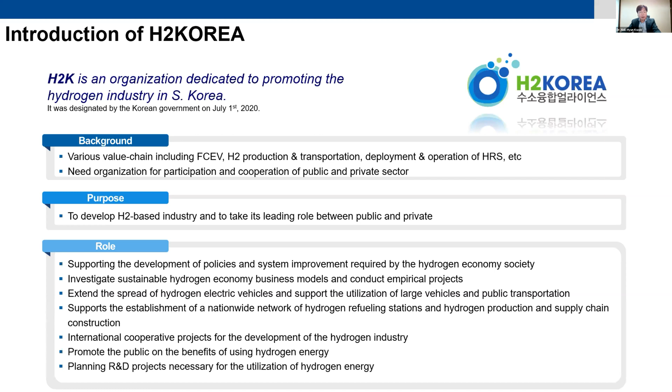H2KOREA has 104 members, including the central government, local government, companies, research institutes, academic societies, and associations. Let me explain the roadmap for the Korean hydrogen economy.

President Moon Jae-in announced the South Korea hydrogen economy roadmap in January 2019. It also declared the vision to become the world's top-class country in hydrogen economy. The Korean government divided the hydrogen economy promotion system into 3 stages by 2040.

As a first step, it is a preparation process for the hydrogen economy by 2022. Since 2018, the government has been making efforts to create policies to boost the hydrogen industry, expand the supply of hydrogen cars, build hydrogen refueling stations, and create laws and systems. The foundation for entering the hydrogen society will be set up by 2022.

The second step is to create a hydrogen economy by expanding the hydrogen industry. To that end, Korea is working on projects including hydrogen cities, expansion of infrastructure from hydrogen production to storage, hydrogen ships, and hydrogen trains. By 2030, we will see a model of a hydrogen economy society in Korea.

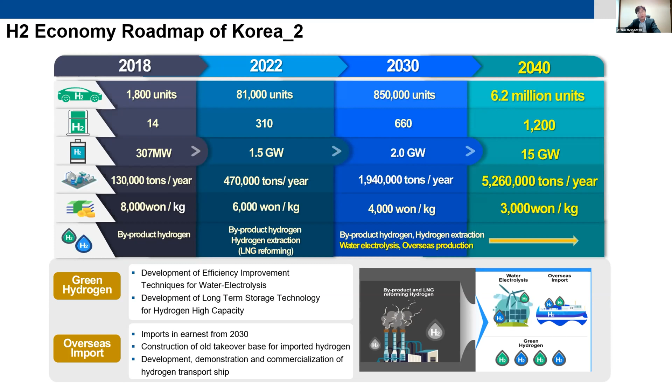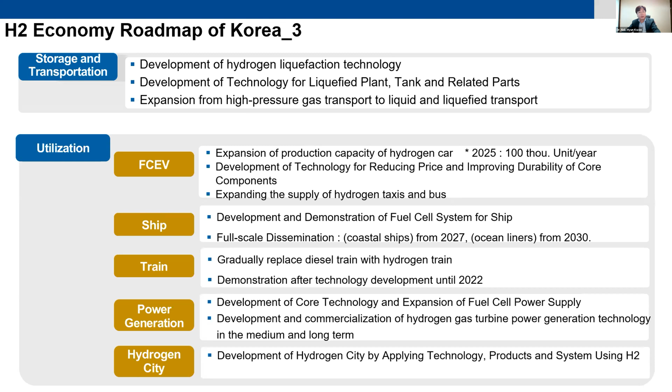Recently the government finalized its roadmap for hydrogen technology and announced it in October 2019. Through this announcement, Korea's vision was to become a leading hydrogen economy by securing world-class technology. You can see here.

First, in the hydrogen production sector, the government set a target of raising the hydrogen demand to 5.26 million tons per year by 2040, and lowering the average supply price, including transportation cost, by $3 per kilogram.

In the storage and transportation sector, the government will upgrade the technology for storing and transporting gas hydrogen to lower the cost of transporting trailers by $0.7 per kilogram.

In the utilization period, Korea has set up a plan to commercialize medium and large hydrogen construction machines, hydrogen trains, hydrogen ships, and hydrogen drones for large-scale logistics transportation by 2030.

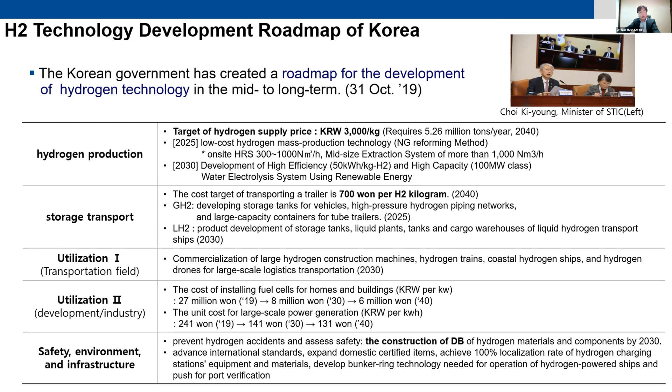To that end, the government plans to complete construction of a database of hydrogen materials and components by 2030.

The government announced its strategy for developing the future automobile industry in October 2019. The main content of this strategy is for all-electric vehicles, including hydrogen electric vehicles, to achieve 33% of vehicle sale share in Korea, and to achieve 10% share in the global market.

In particular, the government planned to expand the lineup of hydrogen vehicles to include SUVs and large trucks, and to achieve a durability of 500,000 kilometers by 2022. It also planned to lower the price of hydrogen vehicles to around $40,000 US.

Hyundai Motors Group presented its FCEV vision and announced a long-term roadmap for 2030. It has set up a plan to produce 700,000 fuel cell systems by 2030, including 500,000 FCEVs per year. In addition, Hyundai Motors Group said it would invest about $7 billion US by 2030 to develop the FCEVs.

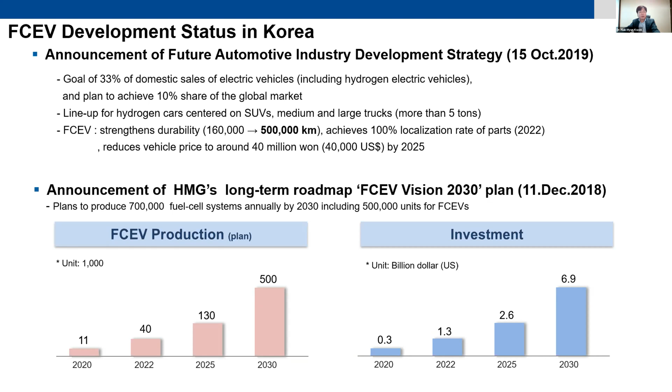This is the Nexo, mass-produced by Hyundai Motors in January 2018. Nexo has made many technology advances compared to the Tucson FCEV, which was mass-produced in 2013. Compared to the Tucson FCEV, output performance is improved by about 20%, and system efficiency is improved by 10%. It also increased durability and lowered prices.

It also starts at minus 30 degrees and can run 609 kilometers on a single charge.

Now, the status of development of large hydrogen cars such as trucks and buses in Korea. Recently, the government has been expanding the distribution of city buses to hydrogen buses as part of an effort to reduce fine dust in the city center. It also plans to develop and distribute hydrogen cars for large trucks weighing more than 5 tons.

Hyundai Motors Company has developed a hydrogen city bus and plans to distribute 35 units to 6 cities, including Seoul, by this year. The hydrogen truck was also developed and applied to garbage collection vehicles, and will be operated in Changwon City. In addition, Hyundai Motors signed a supply contract with H2 Energy of Switzerland for 1,600 hydrogen trucks.

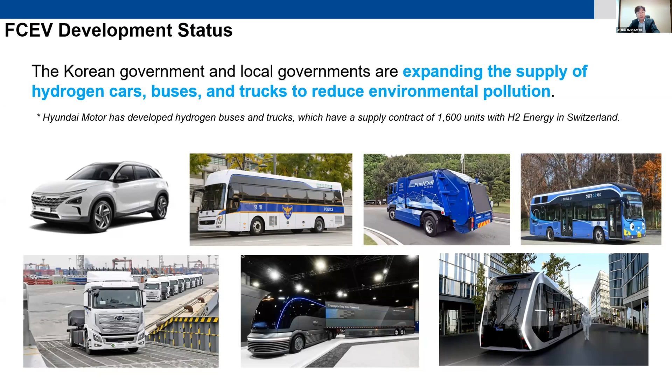Now let me tell you about the current state of the hydrogen economy in Korea. Korea's hydrogen economy operates about 12,000 hydrogen cars, 100 buses, and 20 taxis in service. 1,517 FCEVs were exported as of October 2019.

The pictures below show the operation of hydrogen taxis, hydrogen buses, fuel cell power plants, and a hydrogen refueling station built at the Korean National Assembly. 81 hydrogen refueling stations have been built across the country, with about 118 hydrogen refueling stations scheduled to open by this year. Currently, fuel cell power generation has 53 plants in Korea, producing about 658 megawatts of electric power.

In particular, it is supplying 7.1 megawatt power to buildings through fuel cell power generation.

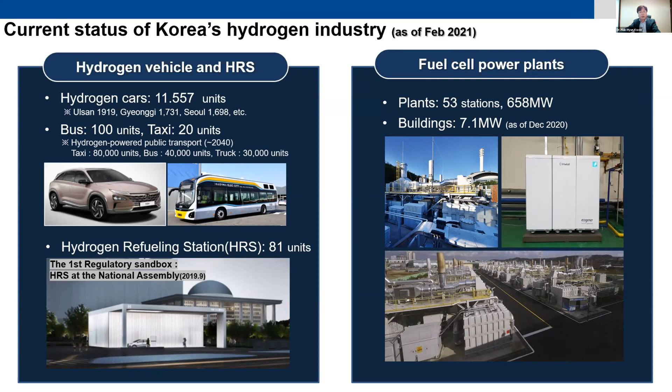Korea has set up a plan to build a nationwide hydrogen charging infrastructure network along with the expansion of domestic hydrogen car supply, and announced a strategy to develop hydrogen refueling stations in October of last year. We are reviewing various refueling and transport methods for hydrogen based on purpose, considering the operation and economics of hydrogen refueling stations. Currently, most high-pressure hydrogen refueling stations are located in certain areas, but in the future, stations using liquefied hydrogen will also be built around the city center.

In addition, hydrogen transportation will be diversified, not only by tube trailer transportation, but also by pipeline transportation and liquefied hydrogen transportation.

Korea is planning to build hydrogen charging infrastructure by considering economic feasibility, scalability, and regional characteristics by expanding hydrogen charging stations. By 2030, 616 hydrogen stations will be built in major parts of the country.

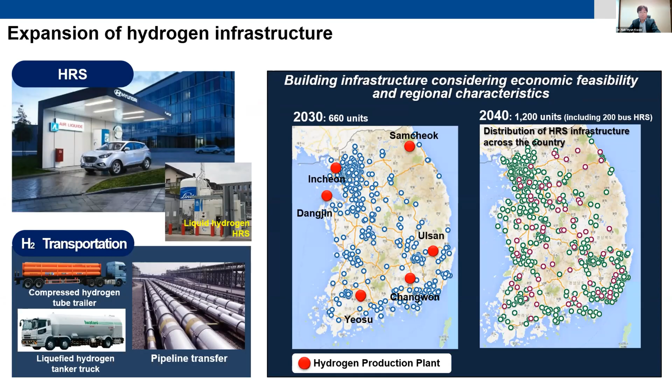Korea is pursuing a specialized hydrogen industry project, such as hydrogen related cities, hydrogen producing clusters, R&D specific cities, and hydrogen mobility clusters. There will be more projects coming up, and by 2030, there will be a visible hydrogen society.

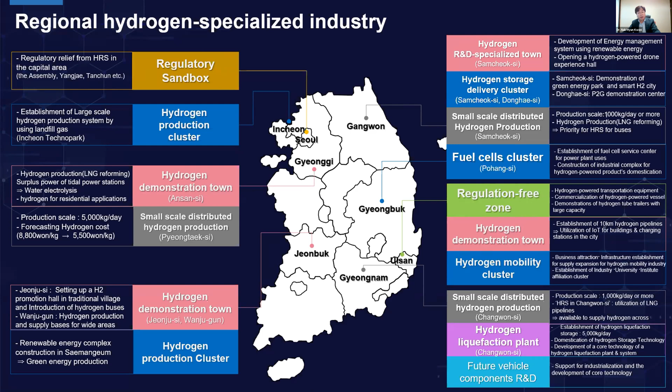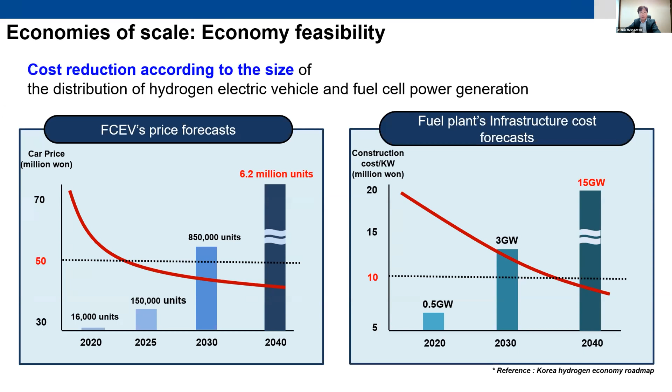The construction cost of a fuel cell for power generation is currently around 20 million Korean won per kilowatt, but the construction cost is expected to continue to decrease as the construction of power generation facilities increases.

The transition to a hydrogen society has many advantages in reducing greenhouse gas emissions and improving environmental problems. The growth of new industries can also lead to the expansion of the new job market and to national value added.

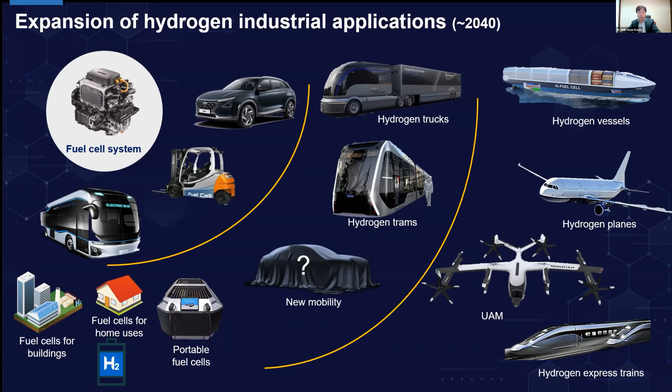However, in order to become a hydrogen society, it is difficult to grow by considering only one country. International cooperation is more important than anything else. The global hydrogen economy will be realized only when countries cooperate with each other in their strengths and technologies and grow hydrogen markets together. As Korea will expand its global hydrogen industry cooperation network with hydrogen promotion organizations around the world, it will support information exchange and global technology cooperation with hydrogen associations and international organizations in each country, and serve as a bridge between the government and the private sector through a cooperative network.

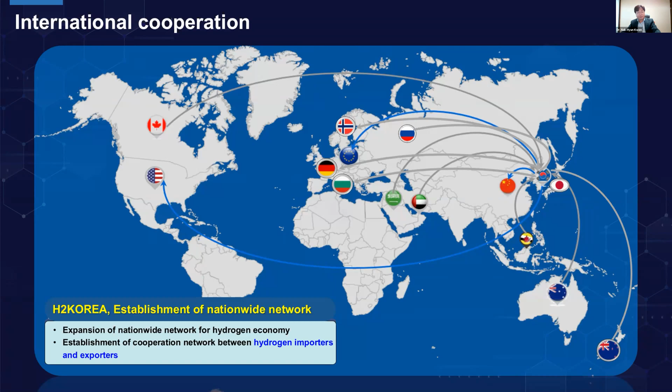As mentioned earlier, Korea plans to push for the introduction of hydrogen, which is lacking, after 2030. To this end, the Korean government set up a plan in July 2020 to build an overseas hydrogen supply chain as a way to ensure a sustainable hydrogen economy. Through this, we believe Korea will promote sustainable growth of the hydrogen industry by securing a stable hydrogen supply chain and contribute to future energy security and the stabilization of hydrogen prices. The government has set up a three-step stage to introduce CO2-free hydrogen overseas.

As a first step, we will conduct a feasibility study for one year. In this process, we will investigate future CO2-free hydrogen production countries and analyze economic, environmental, and technology feasibility according to hydrogen production and transportation methods by country to derive domestic introduction scenarios.

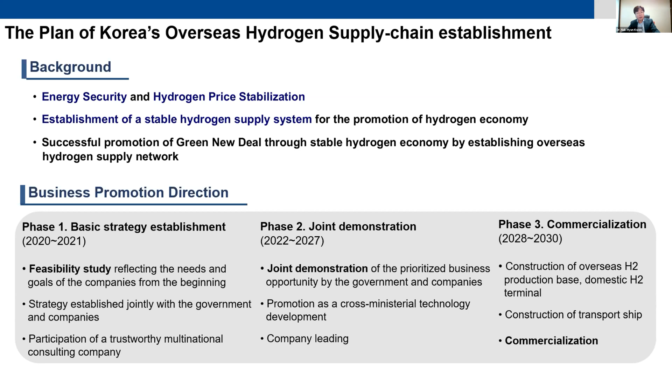Now I will explain the feasibility study for the introduction of CO2-free hydrogen overseas. The first phase of this feasibility study will be conducted by H2 Korea from the end of this year, as a government project.

Hydrogen production will involve a 3-dimensional analysis of technology, environment, and economy for all stages of domestic import and distribution, with a focus on customizing a feasibility study for each country for the introduction of hydrogen abroad. To this end, we will draw up a basic concept design for hydrogen production, storage, and transportation of import-export terminals, reviewing an economic model for hydrogen introduction unit price.

Select a core strategic country for hydrogen introduction and prepare a scenario for CO2-free hydrogen introduction.

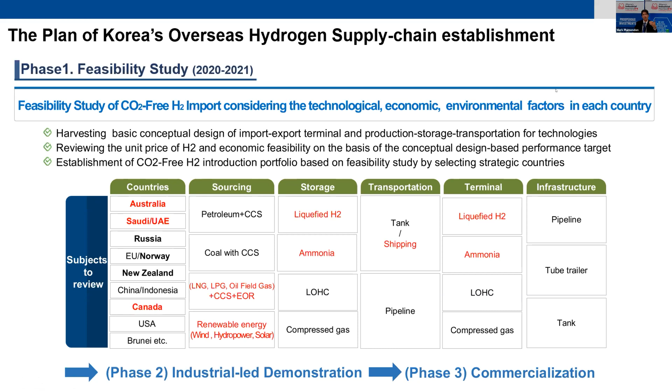Dr. Kwan, thank you very much for the presentation. Lots of information there, very interesting and relevant to all the viewers today. There are a number of questions that have come in on the chat, and I'll ask them to you, hopefully you can provide us some further insight. Some of the questions are around the preferred type of hydrogen, whether it's liquefied hydrogen, organic carriers, or ammonia. Is there a need for all types of hydrogen carriers, or what's your view on demand for the different types of hydrogen that could be delivered into Korea?

Dr. Kwan, did you hear my question? Oh, sorry. Did you hear my question, Dr. Kwan? Yeah. The consideration of introducing hydrogen from overseas into Korea, what type of hydrogen is imported?

First of all, liquefied hydrogen is difficult in the short term because the transportation ship and storage transportation technology are not optimized. The same goes for MCH. Therefore, ammonia, once its transportation technology is commercialized, can be the first alternative.

It is expected that liquefied hydrogen or MCH transportation will gradually increase when commercialization technology that secures economic feasibility in the field of transport and storage of liquefied hydrogen is developed, maybe after 2030 or 2040.

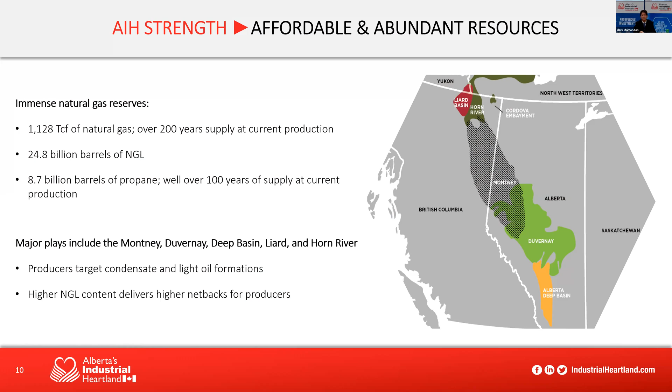Looking forward, we expect that cost advantage of Alberta relative to Gulf Coast to continue, given the structural advantage of our market relative to Gulf Coast.

Another competitive advantage of our region, with respect to infrastructure, is the potential for underground hydrogen storage through salt caverns. Not all jurisdictions have the capability of salt cavern storage — some do, some do not. We're very fortunate here in AIH that the geology is conducive to this type of infrastructure, where companies can inject water into the salt formation to dissolve salt and pump the brine to the surface, leaving an impermeable cavern for storage of energy products. This is a real advantage for our region, we believe.

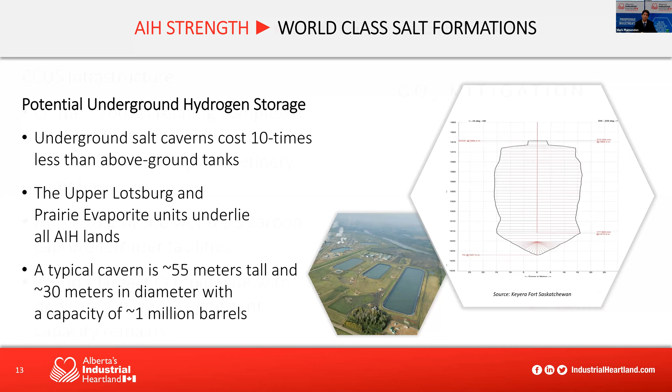And equally importantly, or maybe more importantly, is the infrastructure associated here with carbon capture, utilization, and storage. Significant CCUS infrastructure here in the industrial heartland with surplus capacity enables additional hydrogen production and allows for tying into this infrastructure for carbon capture storage. The capital's already here, so there's capital efficiency associated with clustering and additional investment in hydrogen production. So between the low-cost feedstock, salt cavern storage capability, and the CCUS infrastructure, we believe this jurisdiction is second to none globally for production of low-cost, low-carbon hydrogen.

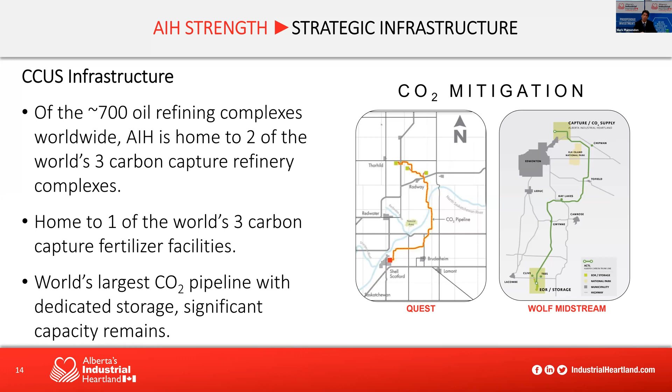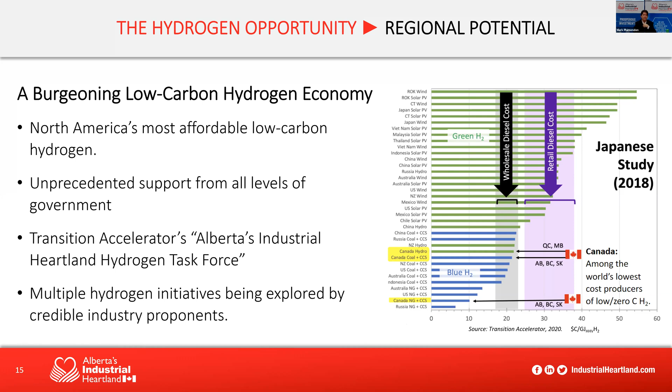Whether the opportunity is with liquid organic carriers, ammonia, or other carriers, these products can be shipped internationally. There is rail service from Alberta's industrial heartland to ports. The most likely port would be Prince Rupert, where shipping time over to Asian markets is approximately half the transit time compared to coming out of the Gulf Coast, and approximately 70% of the transit time compared to coming out of Saudi Arabia. So from a proximity standpoint, we believe West Coast Canada is well positioned to move hydrogen and ammonia into Asia.

Alberta's Industrial Heartland can access the West Coast ports through CN and CP rail activity and links that we have.

In addition to all that, the government of Alberta has put in place Alberta's Petrochemical Incentive Program. This is an incentive program to incent large-scale value-add investment that upgrades natural gas, propane, ethane, and other resources in the province, and hydrogen is part of this program. So for a company to come into Alberta and build a hydrogen production facility with carbon capture, utilization, and storage on the back end, you would qualify for this program, which would provide up to 12% of eligible capital costs back to the project proponent as grants over a 3-year period. This is fantastic support from the government of Alberta.